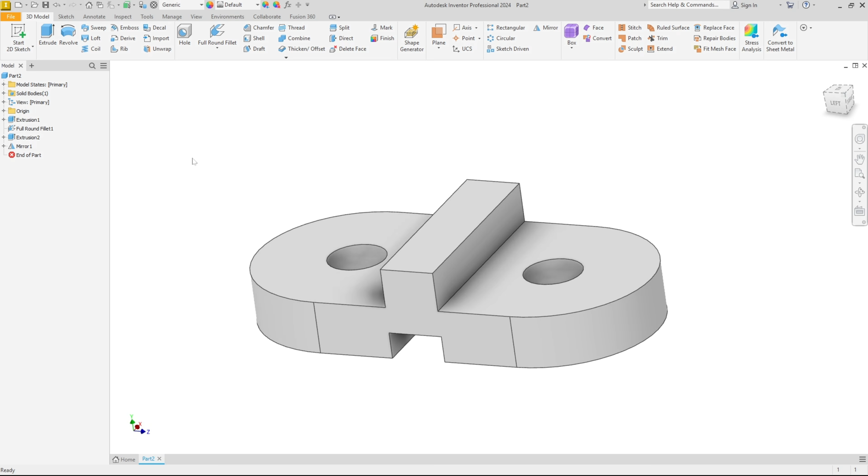Let's create one more tutorial in Autodesk Inventor. In this tutorial, you'll learn to use Extrude, full round fillet, and mirror. So open Inventor and let's go.

The first step to create this part: we will select the right plane and make this sketch, with the midpoint here. The first thing we'll make is create these 4 lines.

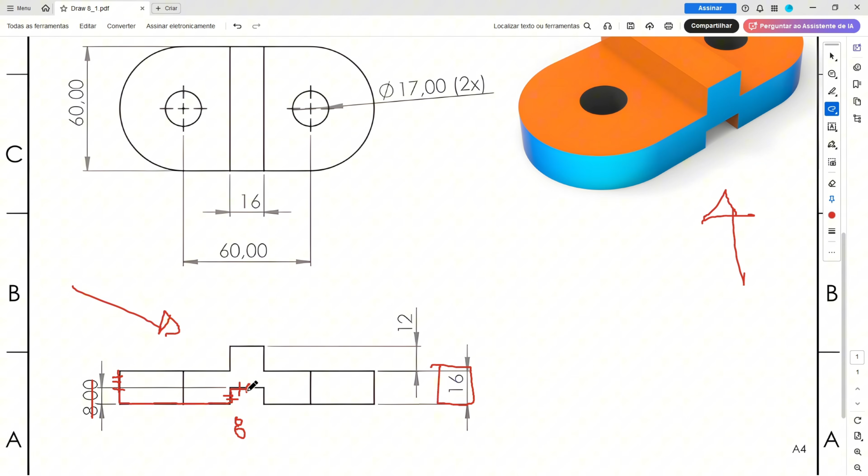This line here has 8 millimeters of length. This line here has 8 millimeters. And this line here has 16 millimeters. The distance between this line and the midpoint is 60 millimeters, because the midpoint is here, so we have 30 millimeters between this point and this point, which is half of 60 millimeters. And the radius here is 30 millimeters because the diameter is 60.

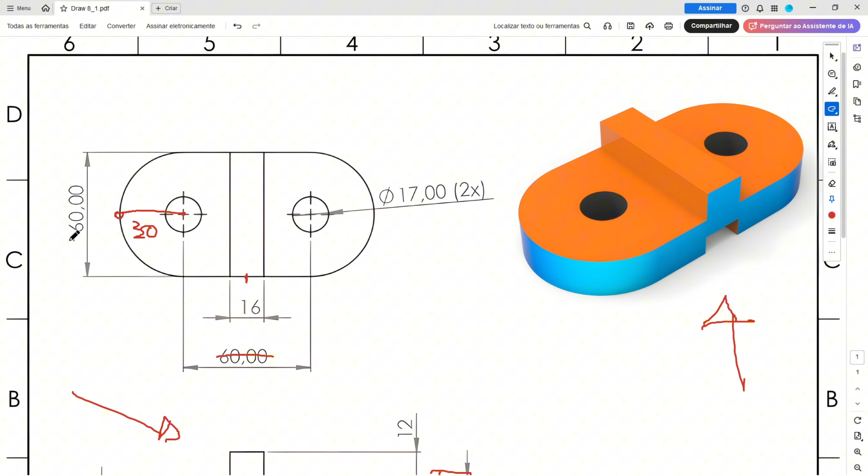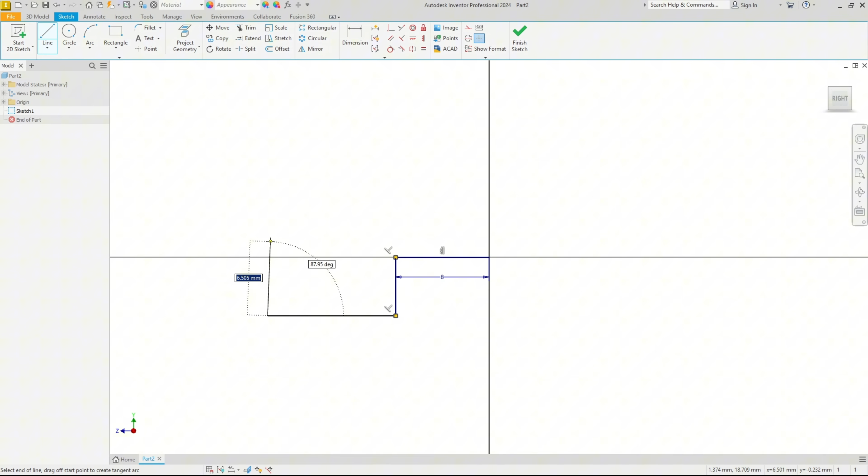So let's create this. Go to create a sketch and select the right plane. Select line, click here on the midpoint, make a line here with 8 millimeters, and make another line here. This line has 16 millimeters.

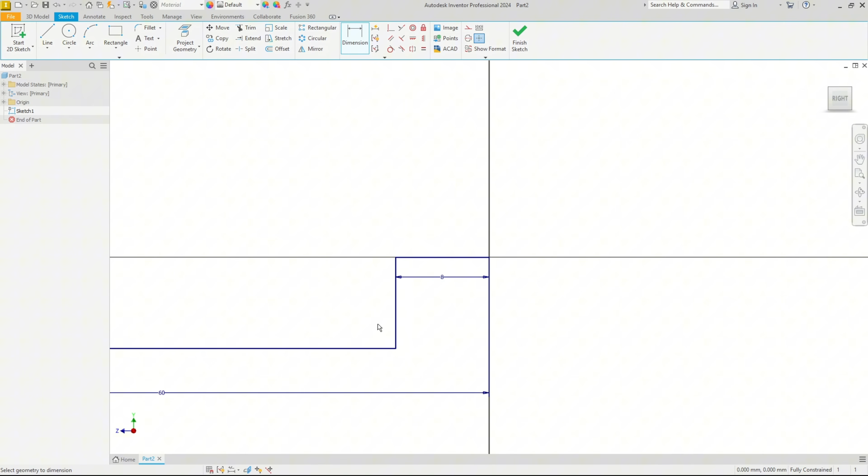Go to constraints and select equal. Select this line here and this one. Then go to sketch dimension. The distance between this line and the midpoint is 60 millimeters. We made this one.

Now we will create this line here, this line here, and a line in the center. This line has 12 millimeters of length, and it is vertical with this line here.

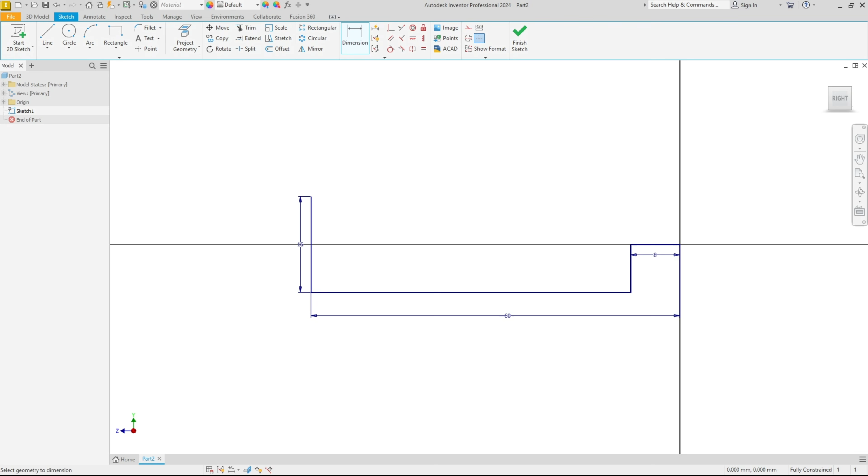So let's create this. Select line again, click on this point, make a line here - it must be vertical with this point. And this line has 12 millimeters.

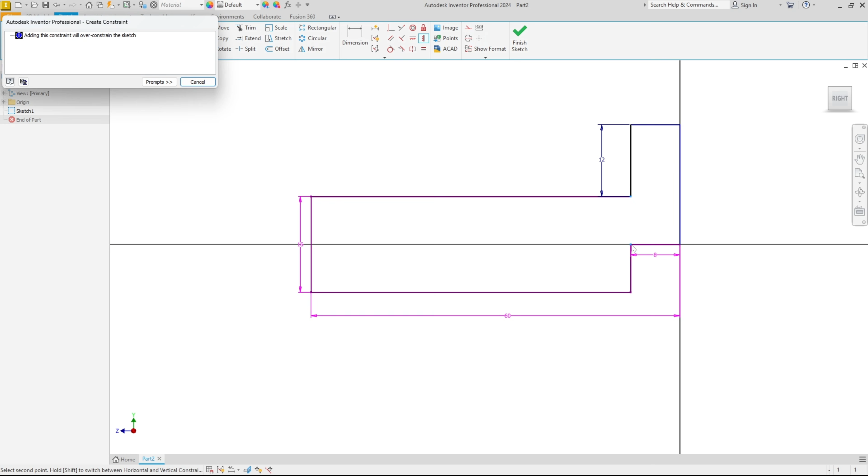Make a line here coincident with the midpoint. It is moving, so we'll go to vertical constraint, select this point and this point here - sorry, it will be horizontal. Okay, we made this one.

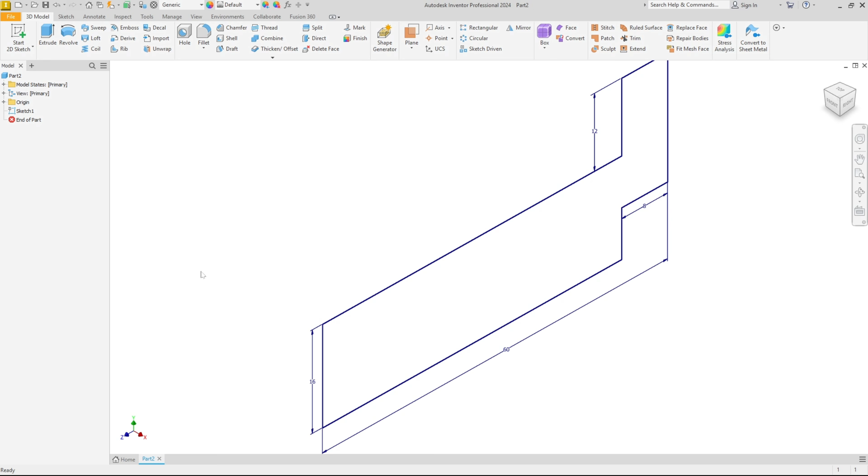Now finish the sketch. We need to extrude this 60 millimeters. Go to extrude, select this profile, set the direction to symmetric, and the distance 60 millimeters. Press OK - we made this one.

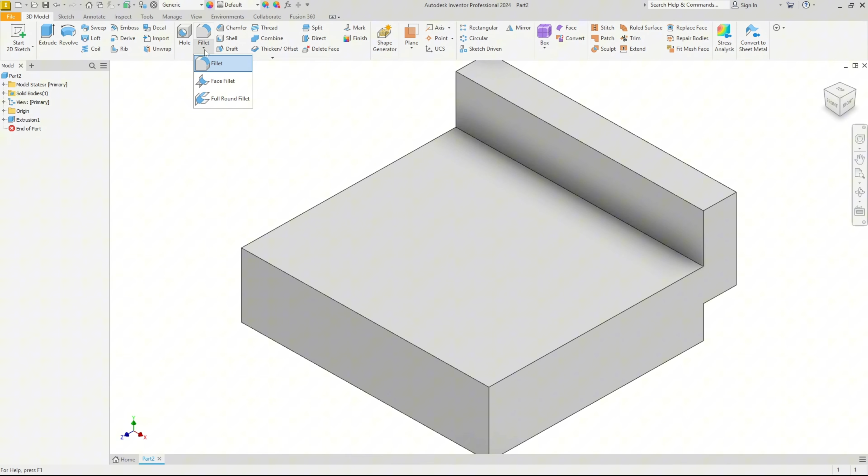Now we will create the fillet here - it is a full round fillet. Go to fillet and select the full round fillet option. Select the A face, the center face, and the B face. Press OK - we made this one.

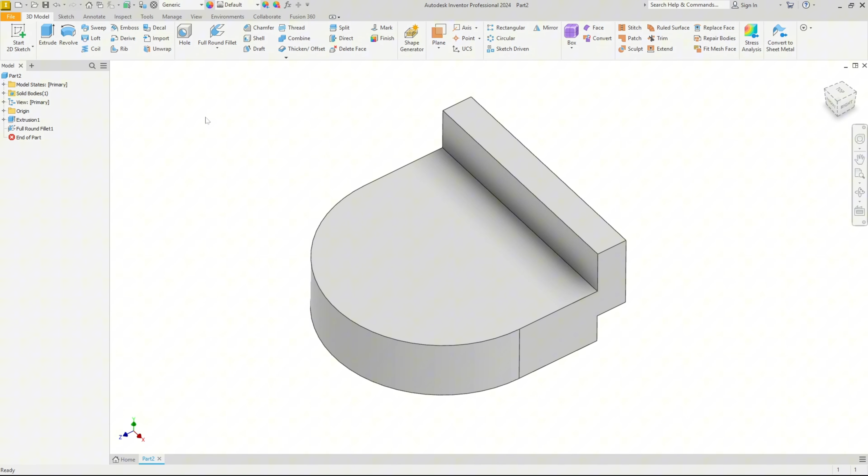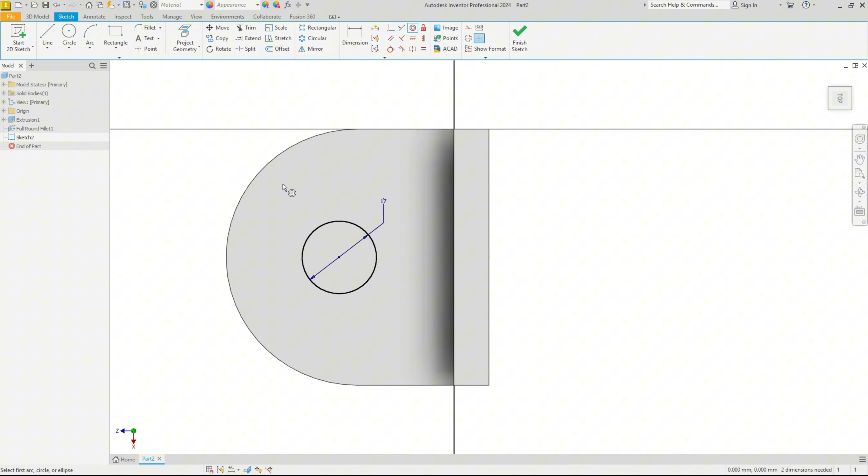Now we will create this hole here. This hole has 17 millimeters of diameter through all this body, and it is concentric with this arc. Go to create a sketch, select this face, select a circle, and make a circle in the center with 17 millimeters of diameter. Then go to constraints and select concentric, and select this arc and this circle.

Finish the sketch, go to extrude, and for the output select cut. The distance here is through all. Press OK.

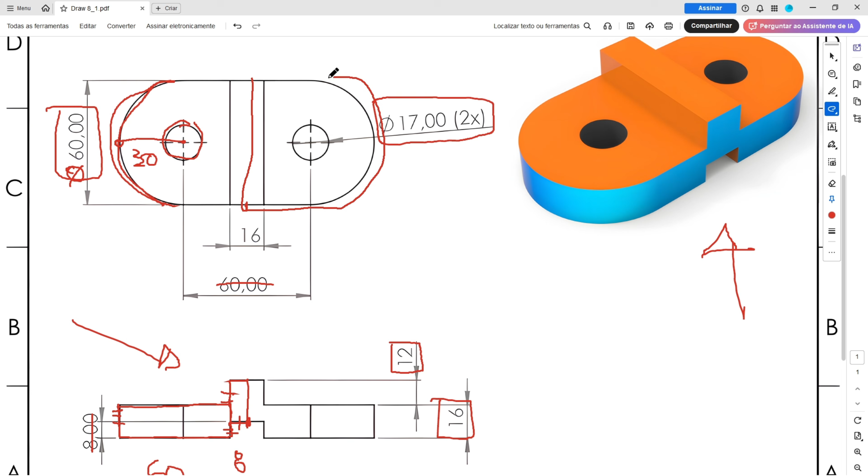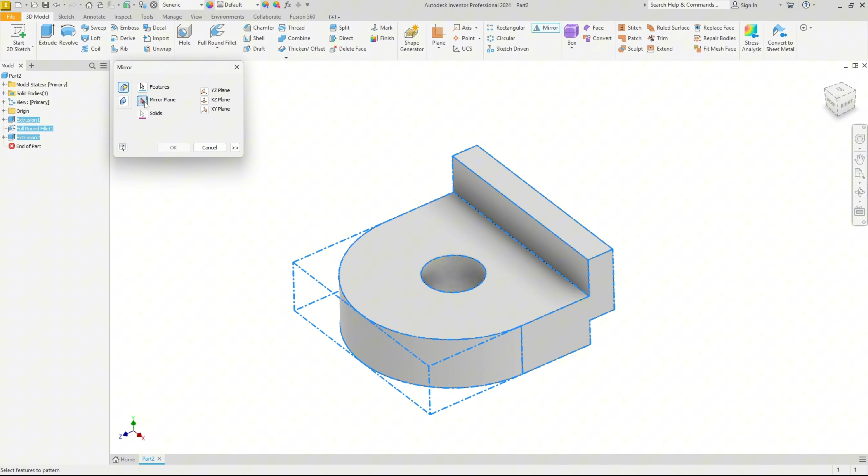Now to create the other side, we will use the mirror because it is a symmetric part. Go to mirror and here select the features - select this body, the full round fillet, and this extrusion as features, and the mirror plane. Select this face and press OK.